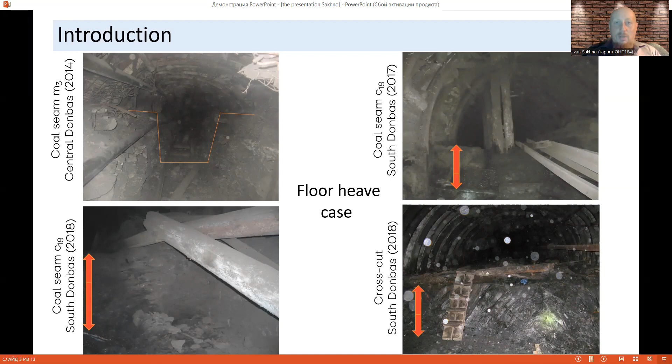About 17–18% of mine roadways in Ukraine are repaired due to dramatic floor heave. Slide 3 shows a case of dramatic floor heave in coal mines of Donbas. The current methods of excavation and support of mine roadways in Ukraine usually do not provide a floor support system to control the floor deformation. Many scholars have conducted extensive research on floor heave. The main floor heave mechanisms are bearing capacity failure, buckling, and swelling.

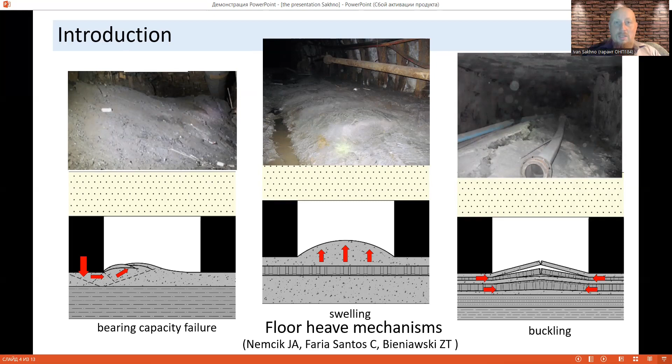Usually, the stress-strain field in surrounding rocks in the cross-section of the mine roadway is analyzed. At the same time, the change in the stress field before and after excavation is not taken into account. In this paper, stress and strain evolution in the immediate floor before and after the excavation phase was studied. This study provides a characteristic of the underground roadway excavation influence on the stress-strain state of the immediate floor and its delamination.

The key study mines are located in Pokrovsky and Dobropilsky districts of Donetsk region. The analysis of geological maps and the current state of the coal industry shows that mines in Pokrovsky and Dobropilsky districts are the most perspective for the development of coal mining. In the current balance of coal production in Ukraine, 65% is the production of coal by mines of DTEK company, located in Western Donbas and Dobropilsky district. 23% is the production of Pokrovsky, Pokrovsky district, and only 8% of coal production is provided by mines in state ownership.

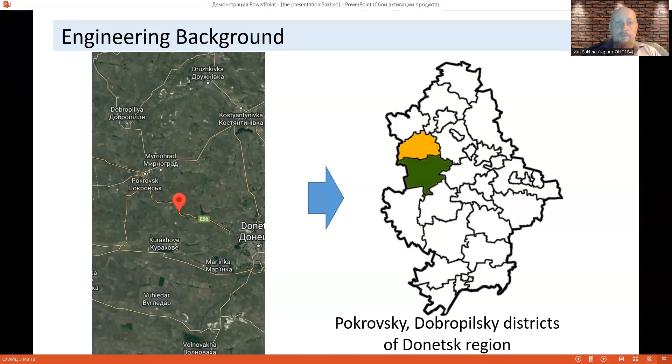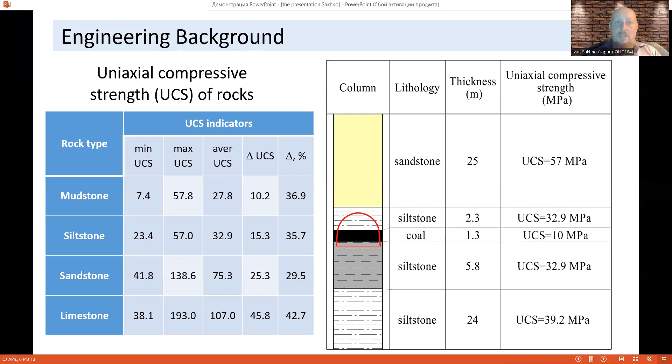The average uniaxial compressive strength indicators of rocks for mines of Pokrovsky and Dobropilsky districts are presented in the table. The typical strata histogram is shown in the slide. Okay, the next part is the method.

The 3D numerical simulation was performed to analyze the stress-strain distribution in surrounding rocks before and after the excavation phase. To simulate the behavior of the rock mass, the Drucker-Prager model was used. The numerical model is shown in the slide. The model is axisymmetric, so half of the cross-section of the mine roadway was simulated. The model was 60 meters long, 60 meters wide, and 100 meters high.

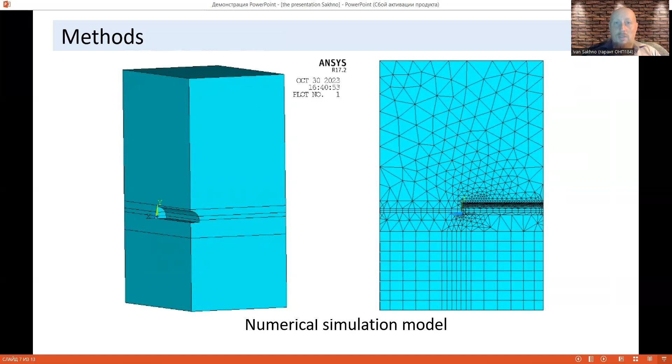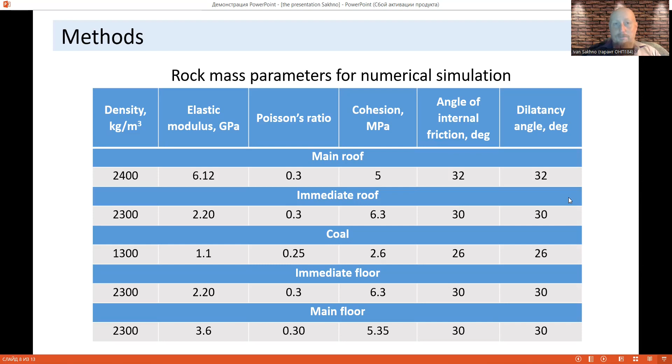An arc-shaped roadway was modeled. A vertical pressure equivalent to overburden stress at 900-meter depth was applied at the top of the model. Mechanical parameters of the rock mass are presented in the table on this slide. Distribution of minimal principal stress is shown in slide 9.

A quantitative assessment of stress variation was obtained by analyzing stress graphs along profile lines in the immediate floor. On the right part of the slide, the graph of the minimum principal stress variation is shown. The graphs are built along profile lines oriented in the immediate floor, 0.25 meter below the bottom, along the roadway axis. The profile line is marked with dots.

The following conclusions were obtained after analyzing the stress graph. At a distance more than 6 meters before the excavation face, the stress field corresponds to the overburden stress, approximately 23 megapascals. The face influence zone begins at a distance of 6.0 meters before it. The stress increases from 23 to 37 megapascals, which corresponds to an increase of 56%.

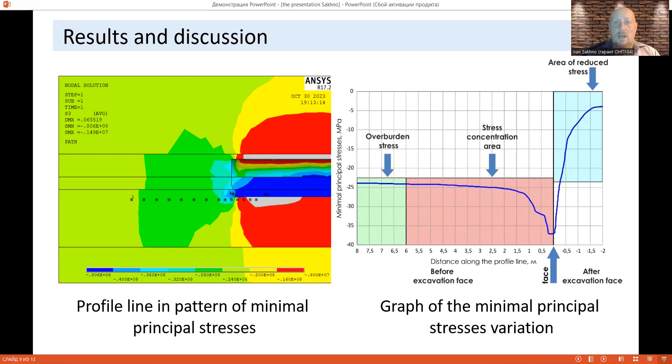The stress relief zone in the roadway bottom appears immediately under the excavation face. The stress decreases rapidly. At a distance of 2 meters behind the excavation face, at a depth of 0.25 meter in the immediate floor, the stress is 3.8 megapascals. Therefore, the stress reduction rate is 84% relative to the initial stress field and 90% relative to maximum stress concentration. Thus, the rocks in the immediate floor are loaded cyclically. At the same time, the sign of the loading and unloading stress changes.

After that, 4 profile lines were built to analyze stress-strain variation in the depths of the immediate floor. Profile lines were oriented in the immediate floor along the axis at distances of 0.25, 0.5, 0.75, and 1 meter from the roadway bottom. The analysis of the minimal principal stress variation shows that the stress concentration zone before the excavation face in the immediate floor is limited by a depth of 1 meter.

The slide also shows the graphs of the equivalent strain variation. The graph shows the change in the deformation type, compression and tension, in the immediate floor before and after the excavation face. Thus, it was established that in the immediate floor in the influence zone of the excavation face, at the initial stage of the roadway life cycle, compressive stress first increased more than 40% in the stress concentration zone. After that, it decreased more than 80% in the stress relief zone. In this case, the rocks undergo cyclic loading and alternating strains.

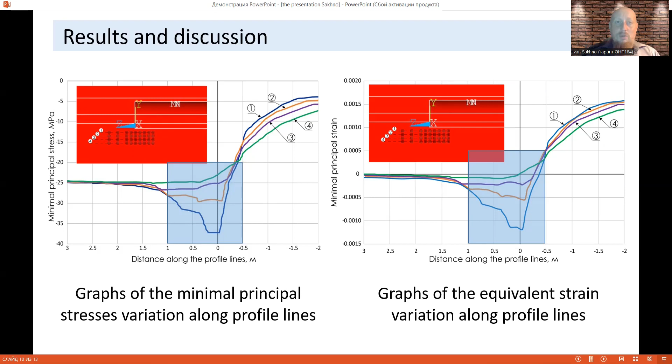It is known that cyclic loading of rock leads to a significant decrease of their strength even after the first loading cycle. Many scholars reported that cyclic disturbance results in numerous tensile cracks and crack branching. So, in the immediate floor behind the excavation face in the stress relief zone, cracks are formed in the floor strata, existing structural defects are branched, interlayer contacts are opened, and delamination occurs. This creates a negative impact on the roadway stability in the next life period.

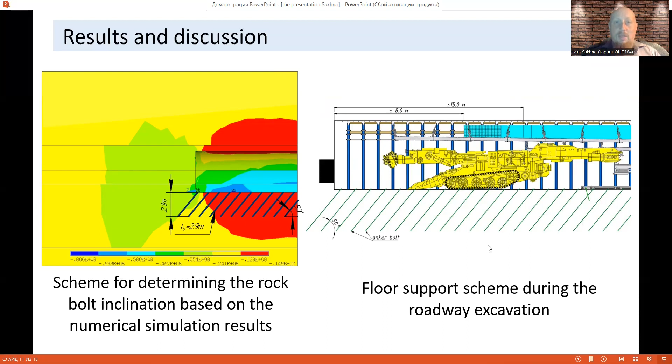The fracturing of rock can be prevented by artificially restraining the delamination of the immediate floor after the excavation face. Rock bolts installed with an inclination to the roadway face were proposed. The rock will be reinforced in the stress concentration zone, and its subsequent delamination in the stress relief zone will be controlled by the rock bolts. The rock bolt inclination is advisable to determine from the stress pattern in the immediate floor. An example of determining the bolt inclination by a graphical method for the simulated results presented above is shown in the left part of the slide. The proposed floor support scheme is presented in the right part of the slide.

Finally, the last part is the conclusions. It was shown that in the immediate floor before the roadway excavation face, a zone of increased stress is formed. Maximal compressive stress in this zone exceeds the lithostatic stress by more than 50%. The stress relief zone in the immediate floor appears after the excavation face. The stress is less than the lithostatic stress and the maximum stress by more than 80% and 90% respectively. Thus, the rocks in the immediate floor are loaded cyclically. This is confirmed by alternating strains in the area of excavation face impact.

Rock bolt support of the roadway floor was proposed for restraining the delamination of the immediate floor after the excavation face. In this case, bolt installation in a timely manner at the excavation face with an inclination to the roadway face was proposed. The most appropriate bolt inclination coincides with the contour of the stress concentration zone.